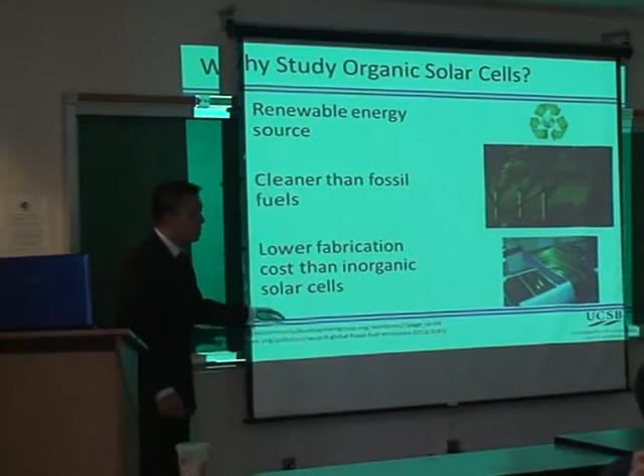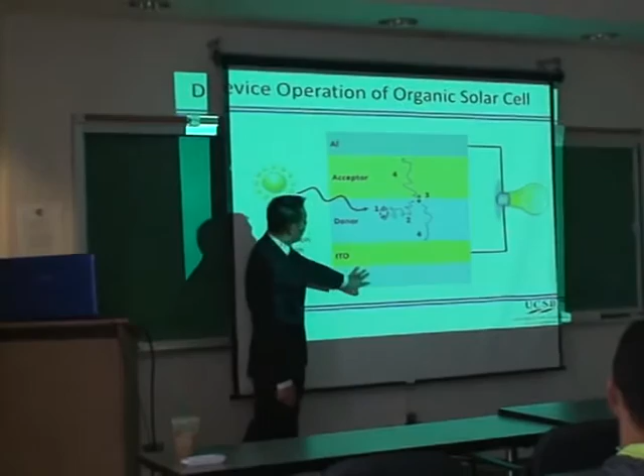The first part of operation is where a photon comes into the material. It could be absorbed by either the acceptor layer or the donor layer. Let's say, for example, it's absorbed by our donor layer. What happens is that when a photon gets absorbed, there's an excitation of an electron to a higher energy level, and what it leaves behind is a hole. These electrons and holes are coulombically bound together, and this is called an exciton. The attraction is so strong that this exciton, this electron and hole, will diffuse together.

That is the second process. Once we form this exciton, it undergoes random walk diffusion, and hopefully it reaches the interface between the acceptor and the donor. When it reaches that interface, the acceptor, often a fullerene, has a strong affinity for electrons and can accept that electron and steal it away. That gives the driving force for charge separation, where we now have the electron in the acceptor phase and the hole in the donor phase. Finally, there's a drift of the electron in the acceptor phase to the cathode, drift of the holes to the anode, and those combine to complete the circuit and give you power. So that's basically the operation of a solar cell.

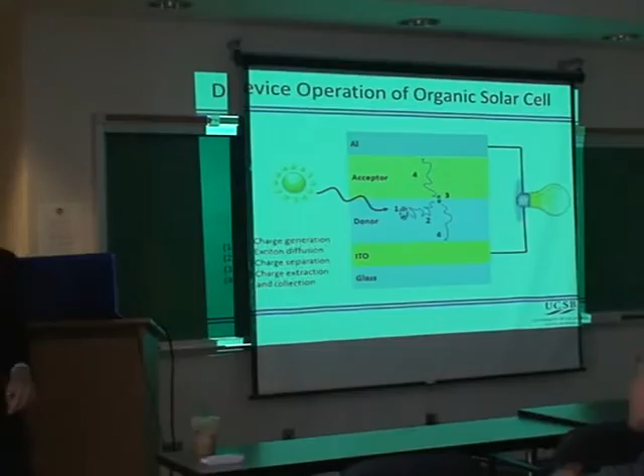And I actually want to show you what one looks like. So this is a funny story — when I teach my classes, I like to talk about my research to the students. One student actually told me that there's a company where you could basically have them mail you a solar cell. So if I find that later, I'll pass it around, but you can actually have them mail you a solar cell.

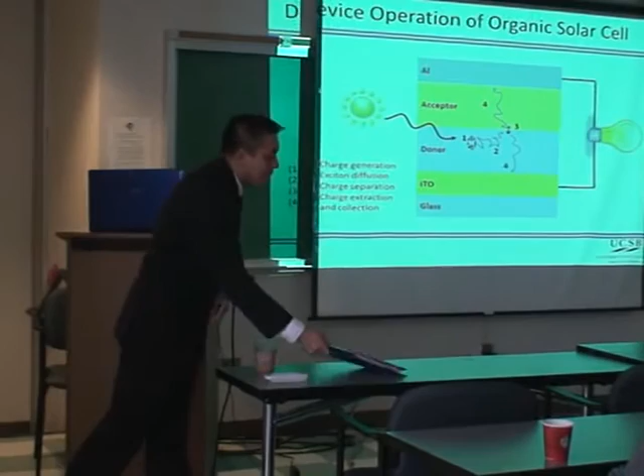And it's actually this really thin flexible solar cell, which you could actually test yourself. It just shows that there are companies making this, and it's actually a reality too. We just gotta work on it a little bit more.

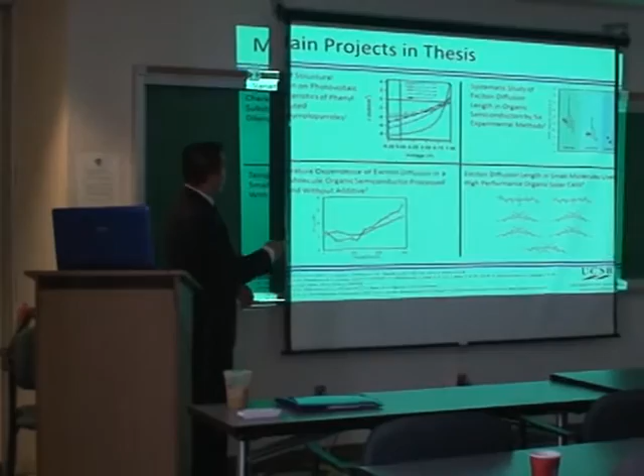So these are basically 4 main projects that I worked on during my PhD. The first project, I had 5 different chemicals, and I studied how slight chemical and incremental modifications affect everything from the packing, the morphology, the absorption, the mobility, and ultimately how that related to device performance in a solar cell. What I then did is I used some of those same molecules for project 2, which was to study how these same chemical modifications impact fundamental properties like exciton diffusion length.

In addition, I wanted to compare different techniques to measure exciton diffusion length, because there are many different techniques, as I will elaborate later. After that project, I wanted to delve deeper into exciton diffusion length, like what is actually the mechanism of exciton diffusion. So in this project, I used temperature studies, and I measured the exciton diffusion length at different temperatures.

In addition, I wanted to look at how processing condition affects the exciton diffusion length. Finally, the last project, I compared a couple different molecules which have previously shown to have high performance in organic solar cells, and I wanted to see what the exciton diffusion length is in these materials, whether they're any different or about the same. Due to limitations on time today, I will only talk about the second and the third project.

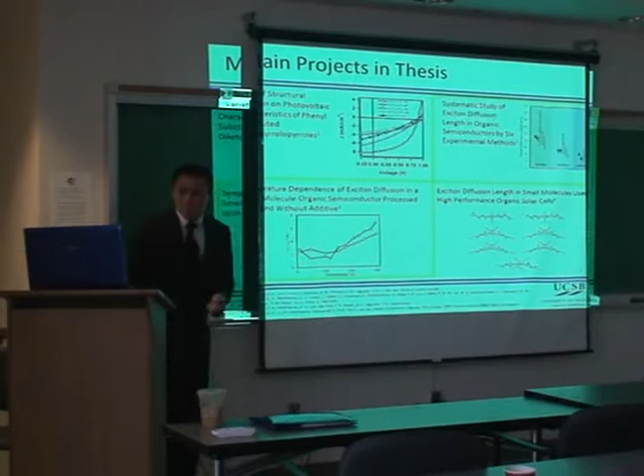Project 1: systematic study of exciton diffusion length in organic semiconductors by 6 experimental methods.

So again, I want to say that I'm focusing on the step where we have just exciton diffusing, and we want to basically increase that length. You can imagine that when light is being shined on this film, excitons are being generated everywhere. But if the exciton is generated down here, it has not too much probability of reaching this interface if the diffusion length is very short. So our goal is to actually increase the length that this exciton can travel.

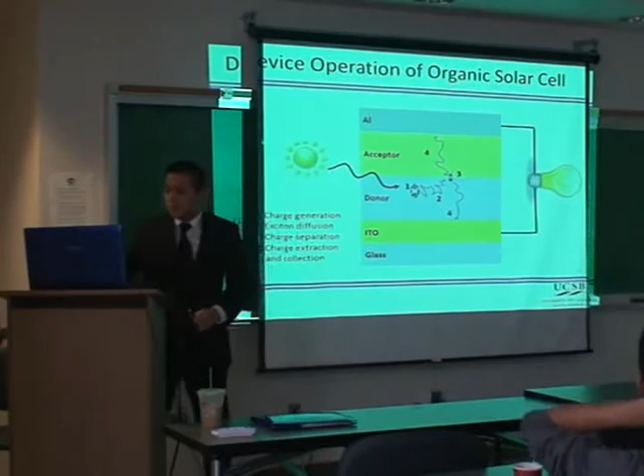So in summary, what we want to do is find the relationship between chemical structure and exciton diffusion length. If we can find this relationship, we can hopefully know what chemical modifications will lead to a larger exciton diffusion length.

Of course, we can study this with literature, because there have been a lot of publications of exciton diffusion lengths in different materials, but there are challenges, because if you have 2 different publications with 2 different compounds, let's say we want to compare the exciton diffusion lengths of these 2 compounds, one was 5, one was 10. Well, this is sometimes challenging because these chemical structures could be very different from each other. They could differ by a number of chemical modifications, so it's hard to tell how one chemical modification impacts the exciton diffusion length.

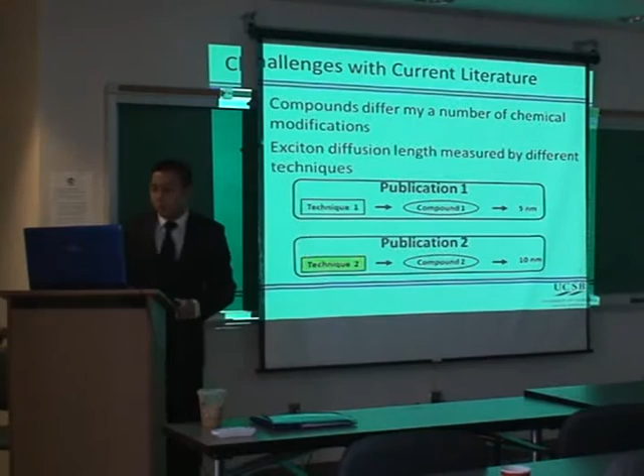In addition, it's further complicated because there are so many techniques to measure exciton diffusion length that there's a very good chance different studies use a different technique, which makes it even harder to compare the 2 molecules to one another. So those are the 2 difficulties of using current literature to study exciton diffusion length.

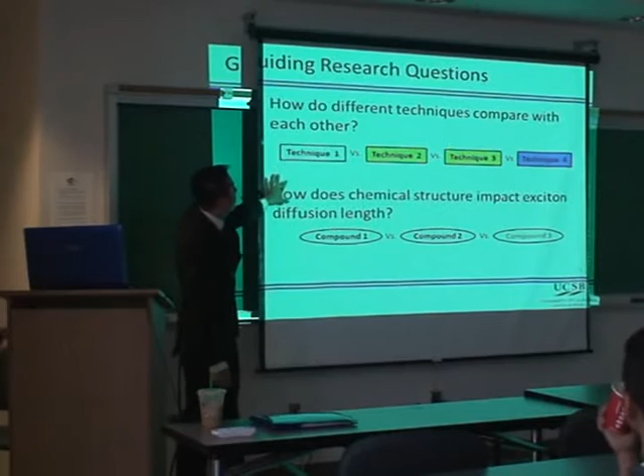With that gap in literature, I developed a couple of guiding questions for my research. The first was, how do different techniques compare with each other? I want to compare the fabrication, the measurement, and the analysis. In addition, at the same time, I want to compare how chemical structure impacts exciton diffusion length for 3 compounds which are very similar, differing only by slight chemical modifications.

So with that, I developed a project proposal: to compare 6 different techniques to measure exciton diffusion length in a class of diketopyrrolopyrrole small molecules. The first choice was what material I would use, so I chose these 3 small molecules because they have very slight but interesting chemical modifications.

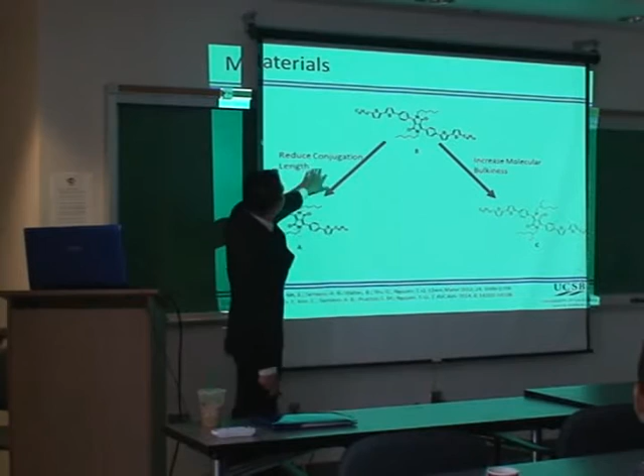For example, when you go from B to A, the conjugation is reduced. What I mean by that is that the number of thiophenes on the backbone is reduced. This one has 2 thiophenes, but molecule A only has 1 thiophene, so we reduce the conjugation length.

And that affects a lot of things actually, because I previously studied these materials in terms of performance and morphology, and I found that as you decrease the conjugation length, you not only affect optical properties, but you definitely affect the morphological properties, like it becomes more crystalline.

In addition, I also studied how increase in molecular bulkiness affects the packing. So the difference between structure B and C is that we've converted the linear alkyl chains to a branched ethylhexyl group. This makes the molecule bulkier and prevents it from packing in film, therefore this film is actually often amorphous - it is kind of randomly packed in a film.

So then I did some literature search to see what are some techniques to measure exciton diffusion length. There are actually a lot. These are 6 I chose to analyze, though there are a few more out there.

When I first saw this, it was kind of daunting. Each technique had a very unique fabrication, measurement, and analysis, and I had no background in this. In addition, no one in my group had previously really studied exciton diffusion length. There was one person who briefly tried it out, Brett Walker, but not thoroughly. So it was very challenging for me to approach this, but nevertheless I moved forward step by step, and through trial and error I worked through it.

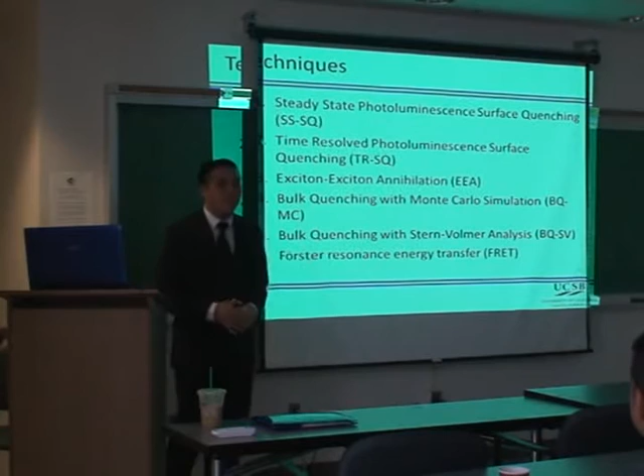What I wanted to present today is 2 techniques on how to measure exciton diffusion length. I'll tell you about the first technique, and also the 4th one, called bulk quenching. The first technique is called steady state photoluminescence with surface quenching, or SSSQ.

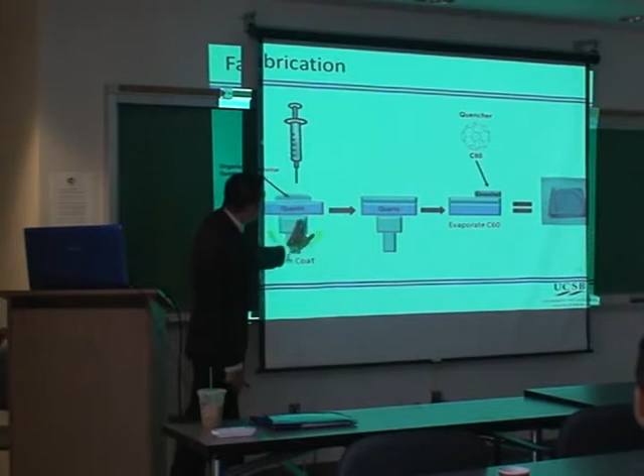The first step is fabrication. What we first want to do is make a layer of our film. We dissolve our organic material in an organic solvent and deposit it with a syringe on a substrate. We then put it on a motor that spins at a specific rate, and that rate determines the thickness. In addition, this thickness is determined by the concentration of the solution we start off with.

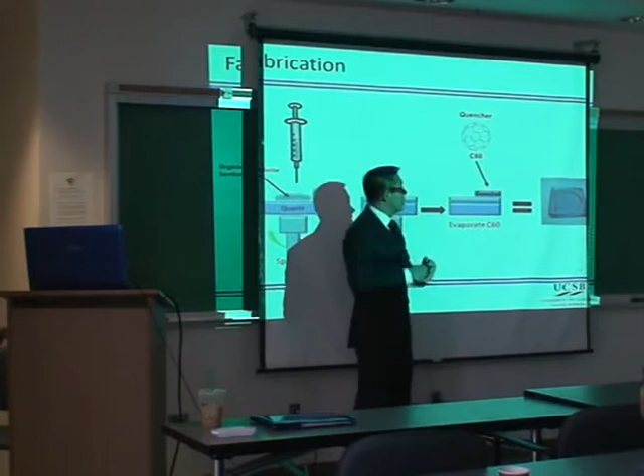We then have a very consistent organic layer on our substrate, and what we want to do next is add a quencher. The quencher we use is C60, which as I mentioned earlier accepts electrons. We cover half the film and evaporate the C60 on our substrate, so half the substrate has the quencher and half doesn't. This reduces the amount of material we need and makes the study more consistent, since we can compare the same thickness on both sides with and without the quencher.

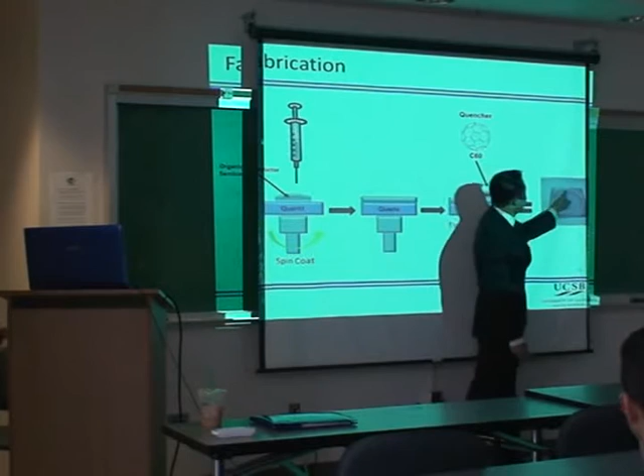The final form of these films looks basically like 2 pieces of glass glued together with epoxy. This is really important because a lot of these organic films are very sensitive to oxygen. If you excite them with light and expose them to oxygen, it's very likely they're going to photodegrade, which might change the chemical structure and reduce the lifetime of these materials.

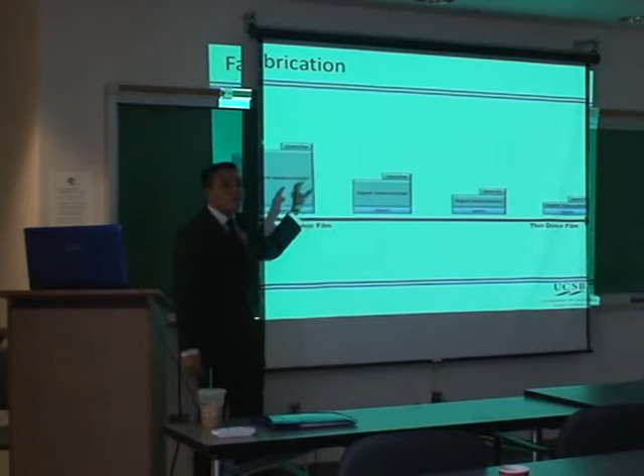What we then do is change the concentration of the solution, and by doing that we're able to produce different thicknesses of the organic layer. So you can see we have thick films, and then the film thickness decreases.

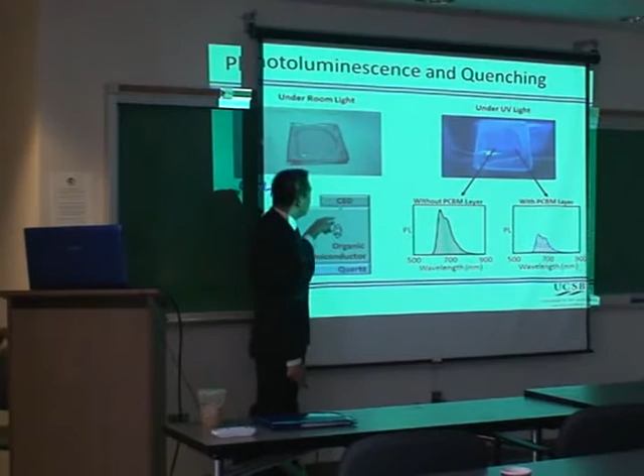When excitons are generated near this C60 layer, there's a good possibility they will reach this quenching interface and be quenched, and therefore they would not be able to relax. One of the processes excitons can do when they relax down to the ground state is emit light. Excitons quenched at the C60 have no possibility of emitting any light, so the amount of light emitted by the right side will be less compared to the left side, and we can actually see that in the spectrum.

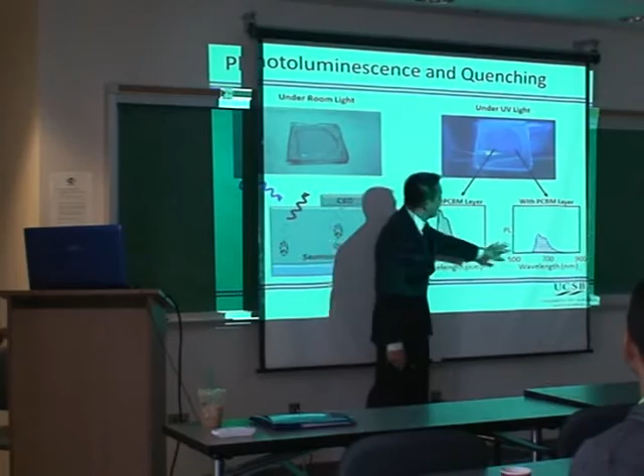When the exciton relaxes back down, it emits a couple of different wavelengths based on the energy levels in the material, with most emitting around 700 nanometers. If you compare the 2 sides, the area underneath the curve is different, meaning there's less total photoluminescence from the right side compared to the left side, because the right side is being quenched at the C60.

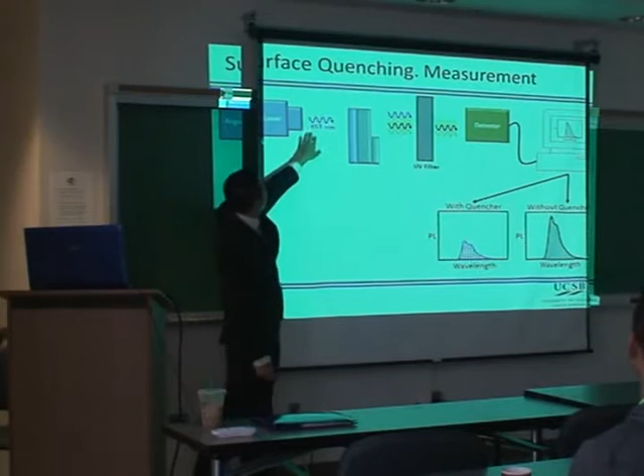So now going on to the measurement. What we do is use an argon laser with a wavelength of 457, pretty close to UV light, and we excite one of the sides. Let's say we excite the side without the quencher first, and we output a number of different wavelengths.

What we then might do is also add a filter, because this UV light is actually quite strong. Some of it won't even be absorbed by this film and will just pass right through. We don't want that to go all the way to the detector, because the detector is very expensive and very sensitive, so we don't want it to ruin our detector. So we filter out the UV, and we only record the fluorescence that comes from this film alone.

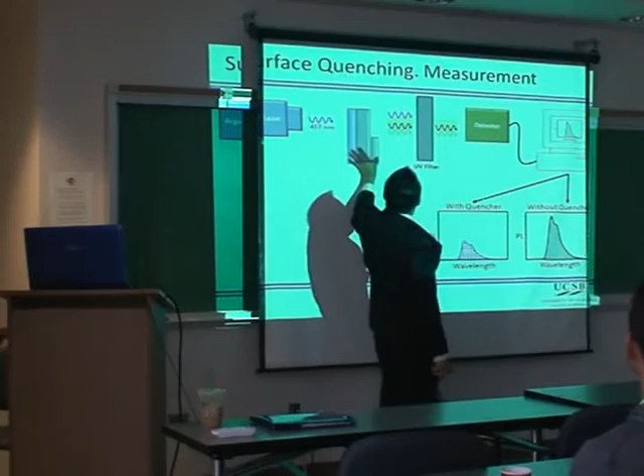Then, as I mentioned earlier, we get the spectrum, which you have here. And if you measure the other locations where there's a quencher, you would get a spectrum where you have a little bit less due to quenching.

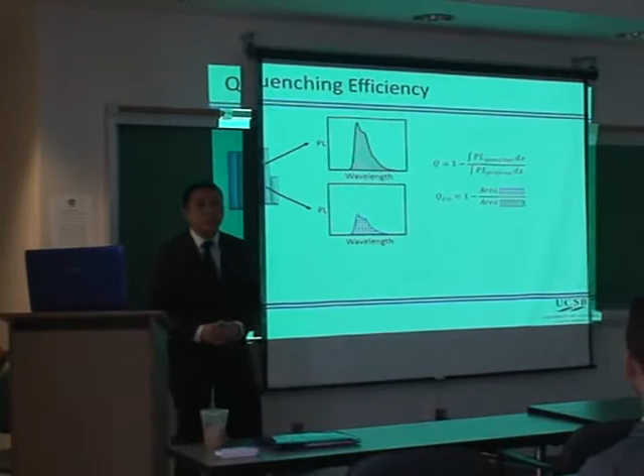So now the next question is, what can we do with this data? Well, one thing you can do is calculate the quenching efficiency. As I mentioned, you have these two different locations, and you could use this formula to calculate the quenching efficiency. Basically this is the integral of the PL with the quencher over the integral of the PL with the pristine. A simple way to think about that is it's basically the area of the film with the quencher over the area without the quencher.

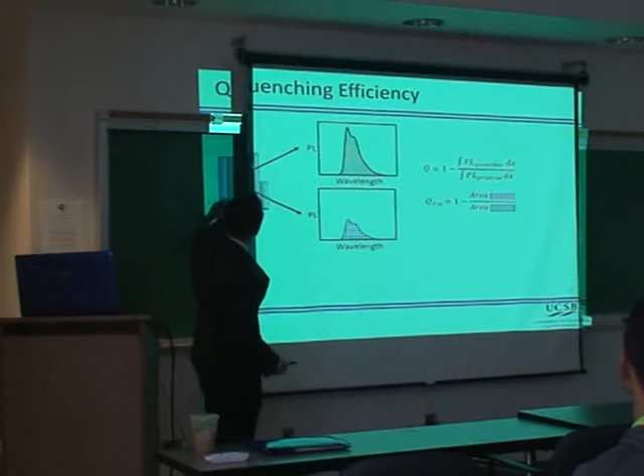So let's say, for example, you had a material with a very long exciton diffusion length. In this case, all the excitons generated on the side with the quencher will be quenched, and your photoluminescence from here will be very diminished, because none of them are emitting, they'll all be quenched. In this case, this whole thing would approach 0, and our quenching efficiency would approach 1. So higher exciton diffusion length, higher quenching efficiency. That's how the two are connected.

So now the question is, how do we connect this measurement with a model to determine what the exciton diffusion length is? What we first have to do is figure out what the exciton density profile is in this film. Actually, it's not homogeneous. You would think that when you shine this film, excitons are generated equally throughout, but in fact they're not. The reason is because as light enters this film, it actually gets reflected at each interface, since there's a difference in index of refraction between each of these materials.

It actually reflects off itself, so it can constructively and destructively interfere with itself, creating these patterns. Further, that optical field could be absorbed by the organic material, decreasing the field. And then finally, with that absorption, you create this absorption profile, or exciton density, here. This is kind of like the initial condition, the initial population of excitons.

What we want to do is see what's going to happen now. You have this initial population — what happens? Well, how excitons move is through diffusion. An example of diffusion is when you add a dye into water: the dye starts off very concentrated and it diffuses out.

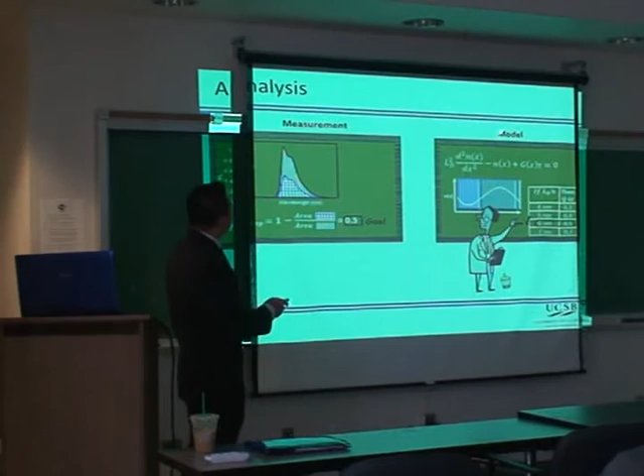So how I like to think about it is that there's this little guy in the computer, and he's kind of comparing a model with the measurement. Let's say, for example, that we did the measurement and calculated quenching efficiency, and we got a number of 0.5. So that is our goal.

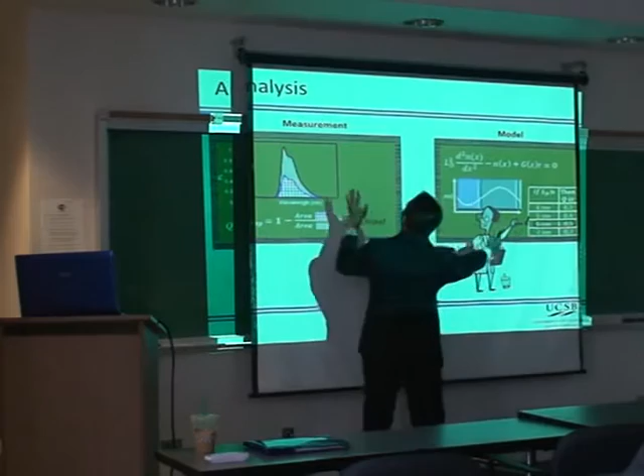So now the guy in the model wants to say, okay, if you have these different exciton diffusion lengths, these are the different quenching efficiencies you would have. And he matches the quenching efficiency with the exciton diffusion length. That is basically how they merge the model with the measurement, and you obtain the exciton diffusion length with this technique.

So finally, the verdict on this technique. The fabrication requires many films, 10 to 20. I actually reduced the number of films because I evaporated only on half with C60, so I was able to cut it by half. But really, you have to probe a lot of different thicknesses, from 10 nanometers up to above 50 nanometers. So that requires a lot of material, a lot of time.

In addition, it's actually very difficult to find an efficient and robust quencher. Before using C60, I tried a lot of other materials because I wanted an interface that was firm, strong, and efficiently quenching. But a lot of materials like TiO2 and polymer acceptors just didn't work as well as C60. So finally, I settled upon C60.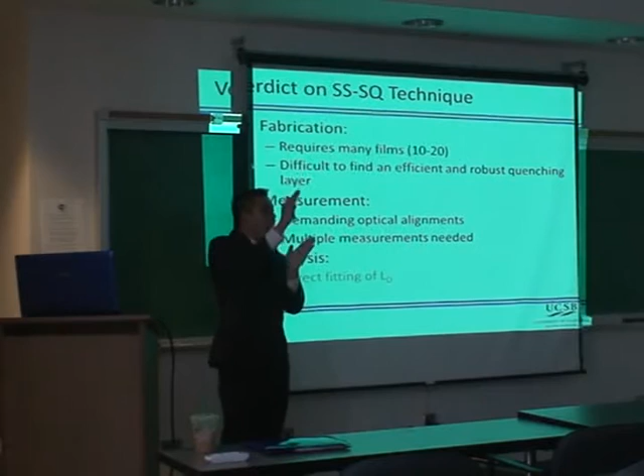In terms of measurement, it's actually quite demanding too. When we measure these films, we have to hit them very normally. If we were to hit them at an angle, some of the light will get reflected, and that would appear as quenching. So it's very important that we hit all these films very normally, and that requires very accurate optical alignments.

In addition, there's also a lot of other measurements you have to do. You have to make sure you know the exact thicknesses of these films, and you have to know the optical constants—the index of refraction and the extinction coefficient—which requires additional modeling with spectroscopic ellipsometry. Finally, the one good thing is that it does fit for the exciton diffusion length directly. You are fitting to that number directly, so you're measuring that. Other techniques, which I'll discuss after, actually figure out a different value and then calculate the exciton diffusion length.

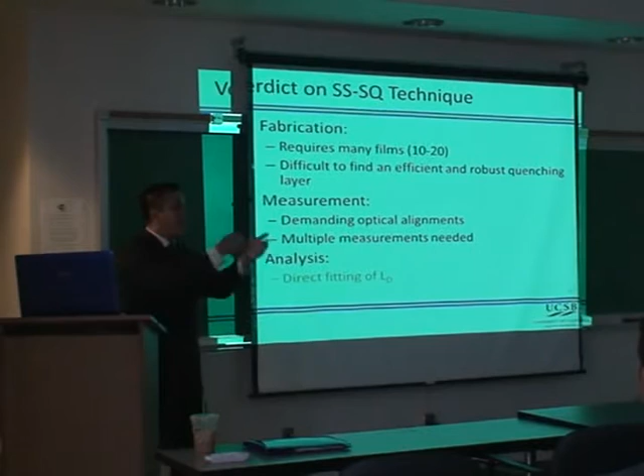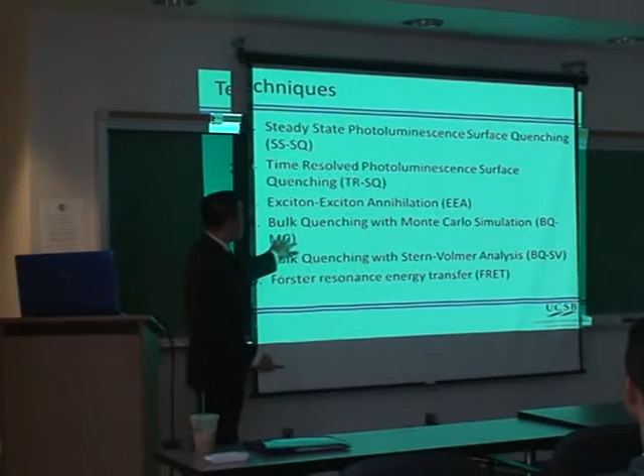So with that, I struggled through these two and finished them, and I wanted to find another technique that was more robust, easier to do for a bigger study, because I didn't want to just keep comparing techniques. Luckily, I was able to collaborate with Olex and travel to the Netherlands, and he had another technique that was really nice, where you could measure the exciton diffusion length with a Monte Carlo simulation and measure it in bulk. I will describe that technique.

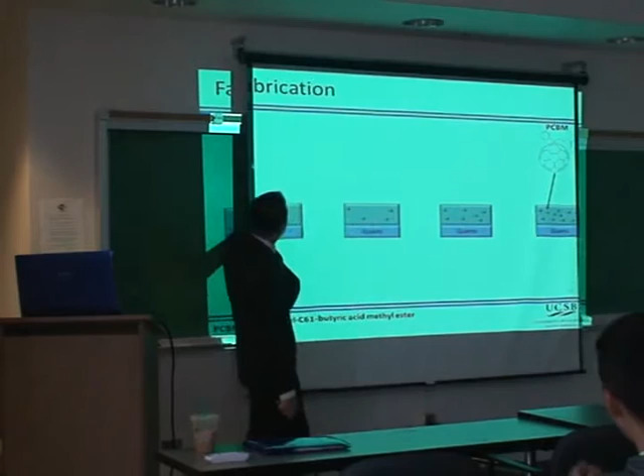So, bulk quenching with Monte Carlo simulation. The preparation is similar—we just use spin coating, but now we add an extra material. These balls are PCBM. It's very similar to C60, but we've added some additional groups that make it soluble in organic solvent. So we mix different concentrations of our organic semiconductor with the PCBM, and we're able to produce different films with different concentrations of PCBM.

The next thing we do is our measurement. This time we have a different type of laser—a titanium sapphire laser that emits at 400 nanometers. The main difference from the other lasers is that this one emits a very short pulse. It kind of pulses the film. So at time 0, you have this population of excitons, and then they'll gradually decay.

As I mentioned earlier, when you have excited excitons, they can emit at different frequencies. But what we want to do is just record one wavelength. So we'll use a monochromator to select one of these wavelengths, and we'll turn on the detector. This detector, instead of recording at different wavelengths, will actually record as a function of time. It will just sit there and wait as these excitons arrive.

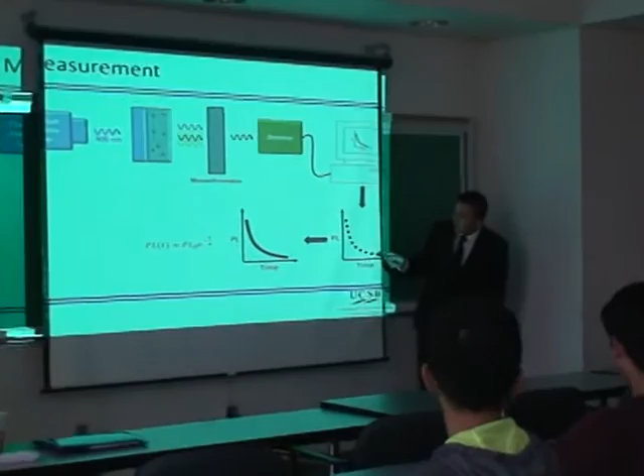What will happen is that we get these points appearing on a graph, showing excitons arriving in the detector at different times. If you were to connect all these points together, it would form a curve here, which is basically an exponential decay. And that can be fitted by a simple decay formula.

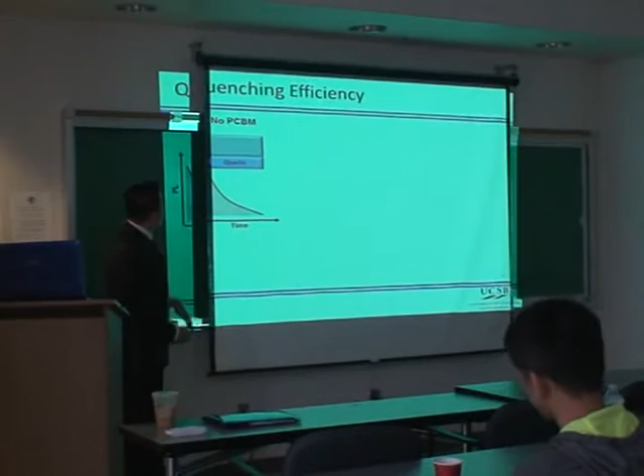So now the question is, how do we calculate the quenching efficiency of this curve? Well, let's first look at the plot for a film without any PCBM.

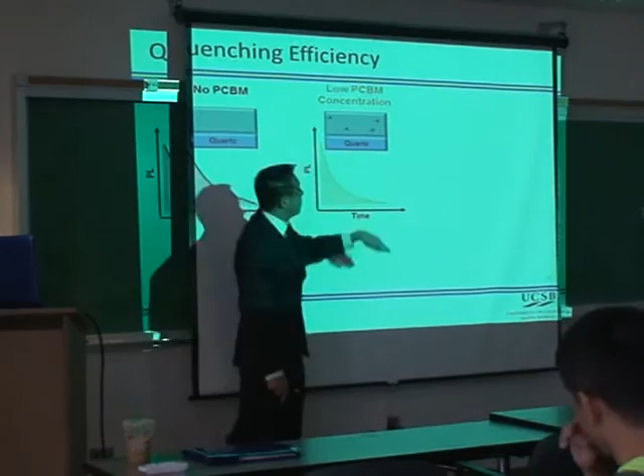Like I mentioned earlier, we'll have this exponential decay curve, and we'll have an area underneath. But if we add some PCBM, there's a more rapid decay of the excitons, because there's a less likelihood of longer-lived excitons, since they're more likely now to reach a quencher. So therefore, we cut down the exciton lifetime. And to exaggerate that further, if we increase the PCBM concentration, the lifetime decreases further.

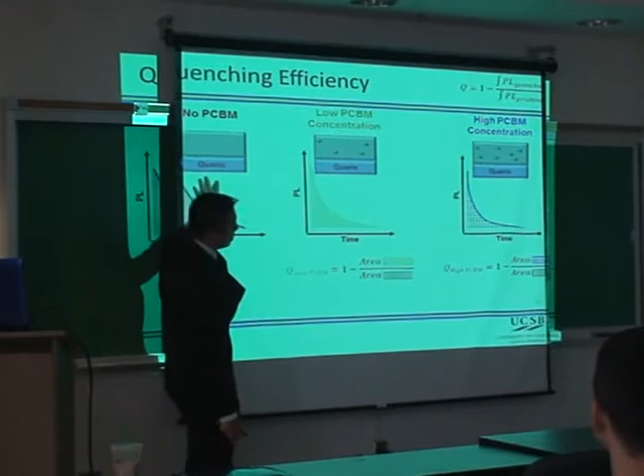So again, using the similar formula as last time, where you have the integrals with the quencher over without quencher, we could calculate the quenching efficiency of each of these films. It's just basically the area with the quencher over the area without. This is the film without any quencher, the control you can think of. And what you see is that when you have more quencher, you have a higher quenching efficiency compared to when you don't have as much of a quencher.

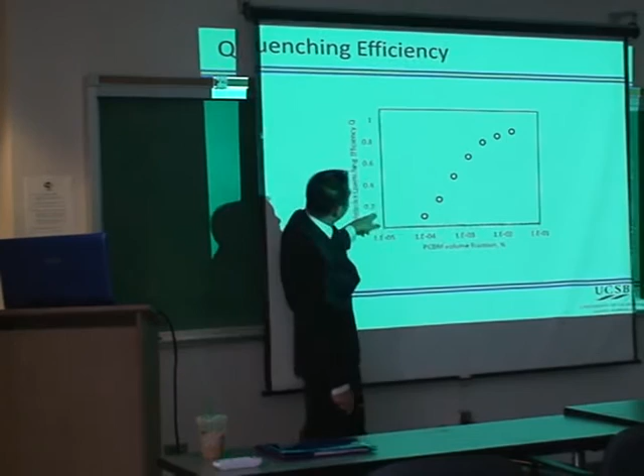So we could do this for a number of different films. We could prepare films with different concentrations of PCBM, and for each of those we could calculate a quenching efficiency. And this is the kind of plot that you would get by doing that.

So the next question is, how do we connect this measurement with a model to determine the exciton diffusion length? This kind of symbolizes the Monte Carlo simulation. A Monte Carlo simulation is basically a program that runs multiple trials. It's kind of a random process, and that's how it determines and fits for the exciton diffusion length.

To give an example, it could run a simulation of exciton diffusion for a couple of different situations. Let's say for low diffusion, medium diffusion, and high diffusion. For low diffusion, not many excitons will be quenched, so you should have this pretty broad curve. But when you have a very high diffusion coefficient, these excitons are more likely to be quenched by a PCBM, therefore the lifetime will be cut down, and you would have this trend where you go from low quench efficiency to high.

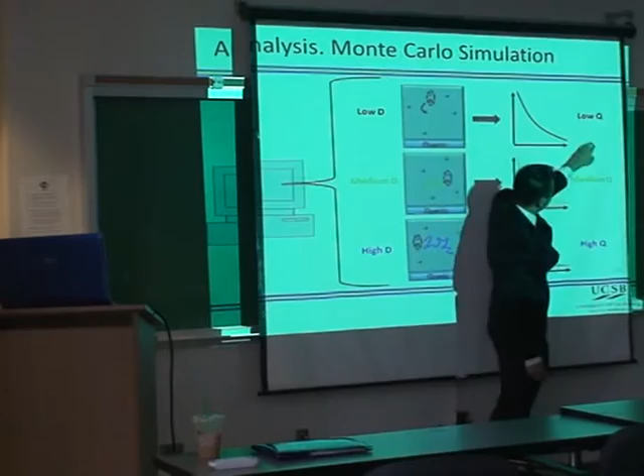So finally, we come back to the little guy in the computer, and what he wants to do is compare the measurement with the Monte Carlo method. Let's say, just for example, that you do the measurement and you get a quenching efficiency of 0.5. So that is the goal to look for.

What you then do with the Monte Carlo is simulate for different diffusion coefficients what the quench efficiency would be, and then match the two. So you see that 0.5 matches 0.5 here, which corresponds to a diffusion coefficient of 10 to the negative 4.

You can then plug this into the simple equation for an exciton diffusion length, here D, and tau is the lifetime, which can just be measured from the pristine film. Finally, you can arrive at an exciton diffusion length. And this is what I meant earlier, that we're not directly measuring the exciton diffusion length, we're actually determining D, and then figuring out what LD is after that. So that's the difference compared to the other technique earlier.

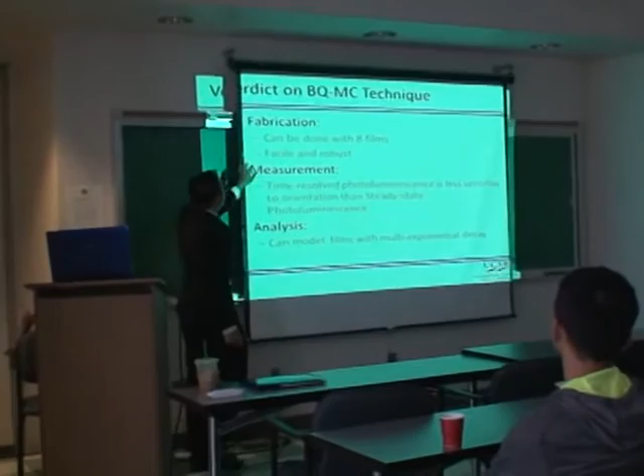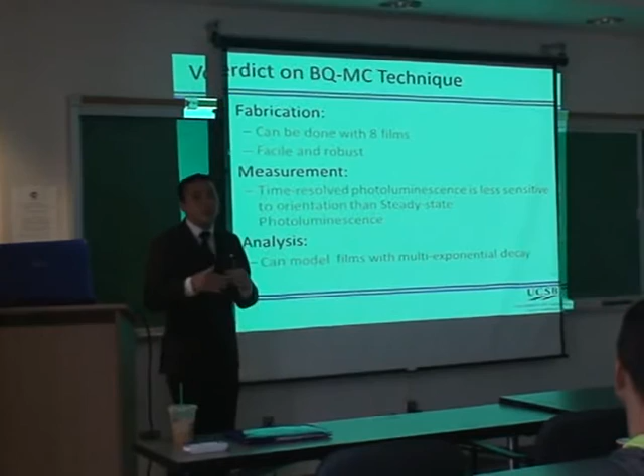So finally, the verdict on this bulk quenching method. The fabrication is pretty nice because it could actually be done with as little as 8 films. And the method is very robust. Spin coating a blend film is a lot easier than preparing these bilayer films. It requires less material, fewer procedures, fewer steps.

In addition, the measurement uses time-resolved spectroscopy. As I mentioned earlier, with steady state, it's extremely sensitive to orientation of the film. But time-resolved is a little less sensitive, so it makes the measurement a bit more accurate for our exciton diffusion length.

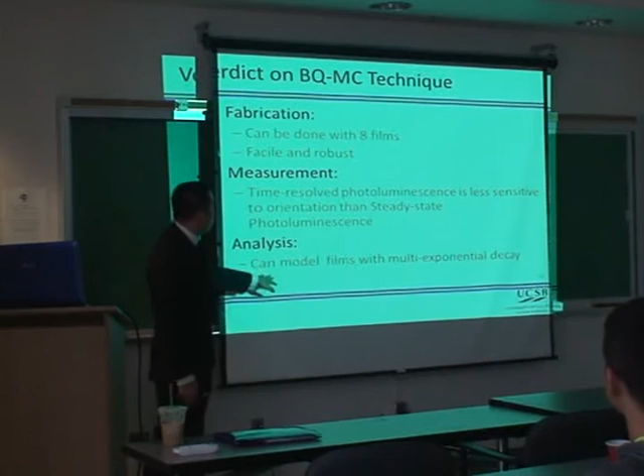And then finally, the analysis. It's also nice because this model can actually measure multi-exponential decays. There are some methods that only work with single exponential decays.

So I discussed technique 1 and 4, and I don't have time to discuss other techniques, but rest assured that I did go through these. I actually collaborated with a lot of groups, like one in Ireland, and we went through all 3 materials with all different techniques, comparing the fabrication, measurement, and analysis. It's a very comprehensive work.

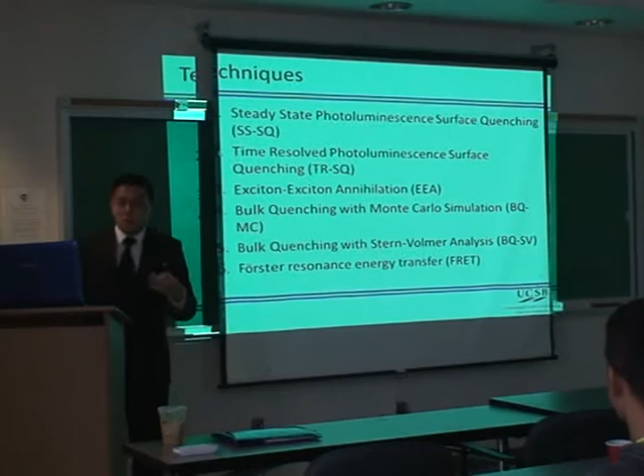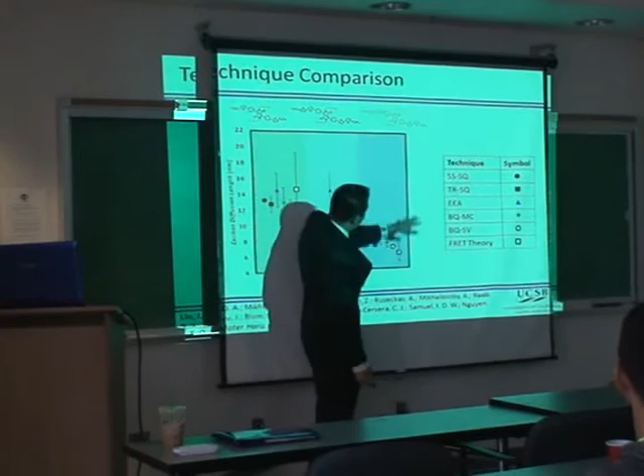So one thing we can do first is compare techniques, and one way we can do that is just look at one material with different techniques. Let's start with this material here, the bulky group. We can see that they actually lie all pretty close together, within the error of their values. So this would seem to indicate that the techniques are very similar. No matter what you get, you'll get the same result.

But if you look at this material here, the smaller one, now we get this larger distribution of exciton diffusion length. This was very confusing — same material, but different exciton diffusion lengths and larger error. The reason is that this material is very crystalline relative to this one, which is amorphous. When you have crystalline materials, they're extremely sensitive to how you process them — how long you wait for them to dry, how fast you spin them, the ambient temperature — anything that changes that morphology. And that morphology will change the exciton diffusion length you measure. So the conclusion is that if you're working with crystalline materials, you have to be careful comparing different techniques. It's maybe only good to compare amorphous materials between different techniques.

The next thing we could do is, instead of comparing techniques, compare chemical structure across these three materials. What we see is there's actually a trend downwards. One thing we found is that this correlates pretty well with the crystallinity. We did X-ray diffraction measurements and measured the order in the film, and we see that this trend correlates with the order in the film.

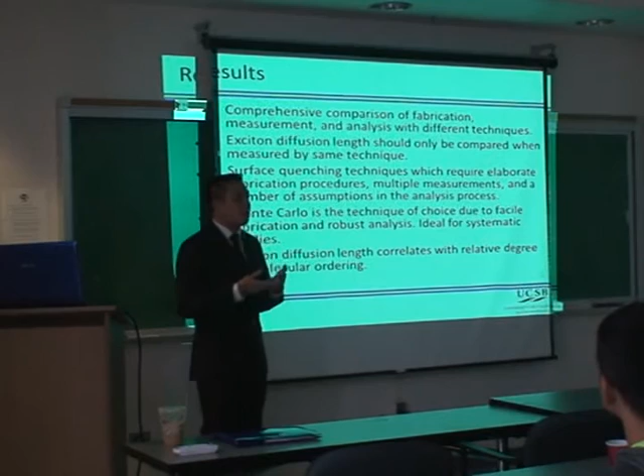So to summarize, the main contribution of this work was that it provided the research community with a comprehensive comparison of the fabrication, measurement, and analysis of different techniques. What that enables is that a new researcher could come in and say, okay, this is what I need in terms of instrumentation, and this is the type of material properties I might want to consider if I want to do this process.

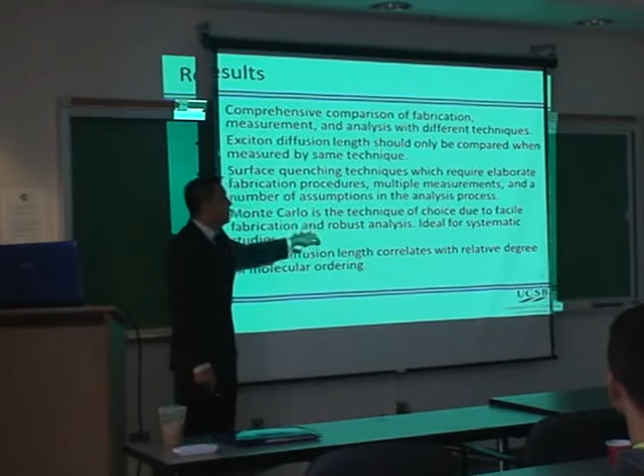In addition, my work showed that exciton diffusion length should only be compared between the same technique, just to be safe. I also found, from experience, that surface quenching techniques are quite demanding — they have elaborate fabrication, multiple measurements, and a number of assumptions in the process. However, bulk quenching with Monte Carlo simulation is actually a really good technique because it can be done very quickly, and you can do a lot of different systematic studies. Finally, we find that the exciton diffusion length correlates with the degree of molecular ordering.

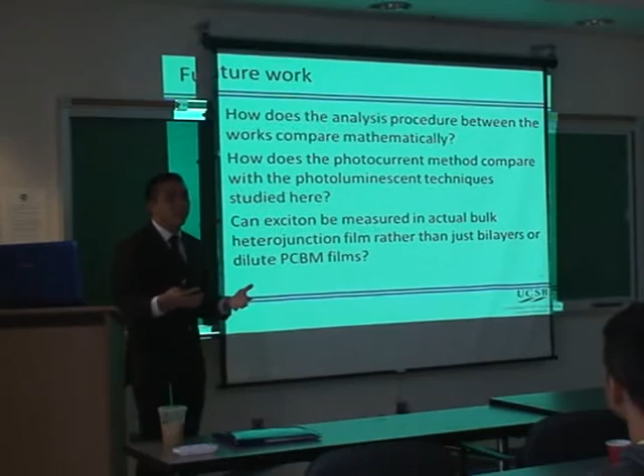So if I had more time for this project, some future work questions I might ask include: how does the analysis procedure differ between the works compared mathematically? How does the actual math calculating the exciton diffusion rate compare? Actually, this is being done by one of our collaborators, because for two of the projects I worked on, I didn't have the expertise to do the analytical modeling, so I collaborated with Professor Carlos García-Cervera, and they are now working on the mathematical model.

Some of the preliminary results actually show that some techniques overestimate the diffusion coefficient compared to others, just based on mathematical calculations. Another question I might ask is how does the photocurrent method compare with the photoluminescence techniques?

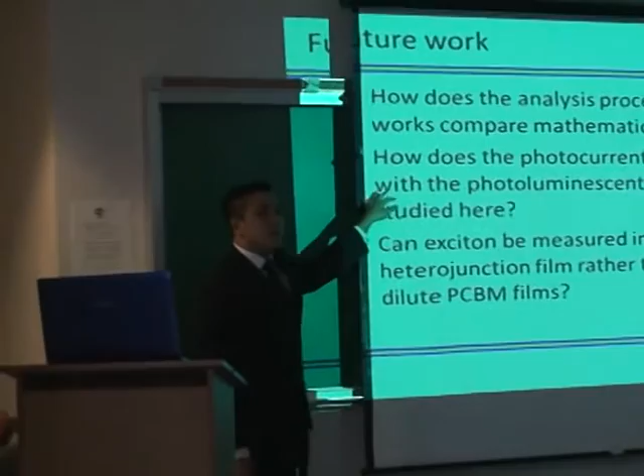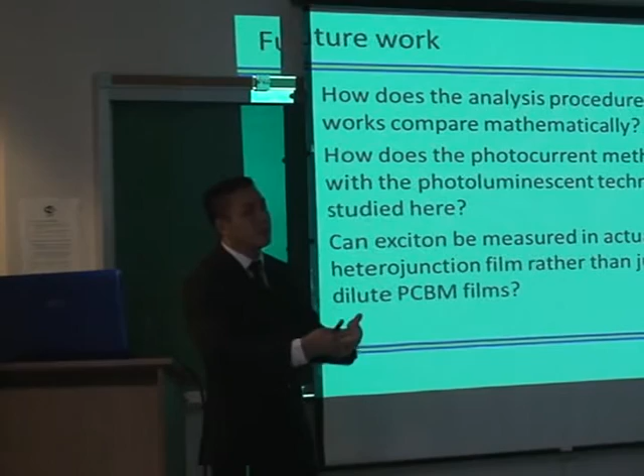All the techniques I studied in this specific work were for materials which are able to emit light. But there are actually a lot of materials that aren't able to emit light, and for those materials, the way to still calculate the exciton diffusion length is to measure the current, because the more excitons that reach that interface, the more current you would generate. So you can calculate it that way too.

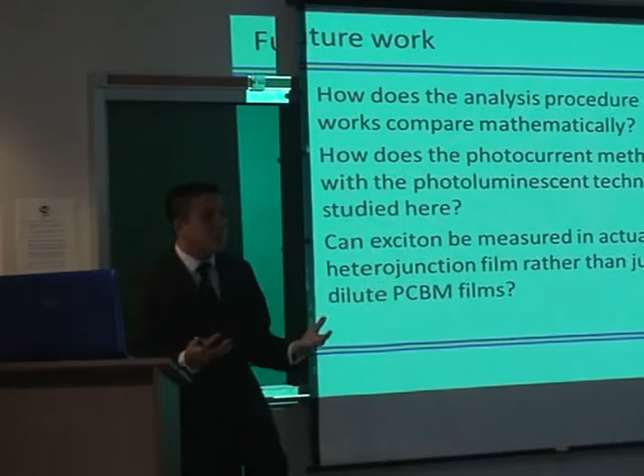And then finally, another question that might be interesting to probe is: can exciton diffusion length actually be measured in a bulk heterojunction film rather than just a bilayer or dilute PCBM film? That's usually the conditions that we probe, but most solar cells are actually a bulk heterojunction, which means that the two materials are intimately mixed together.

So now that I finished that project, I knew a good technique to use is Monte Carlo, so I could use that technique to do another study. One thing I wanted to probe was the temperature dependence of exciton diffusion length in a small molecule semiconductor, with or without additive. I wanted to give some background for that motivation.

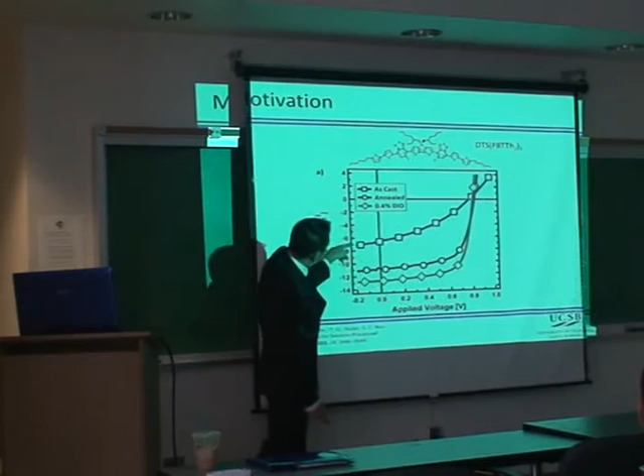In the field of organic semiconductors, there are actually a lot of studies that have shown that when you process a film with a high boiling point solvent, such as diiodooctane, there's an increase in the current generated. For example, this blue going to this yellowish goes from 7 to 13. Most of the studies actually study how that affects charge transport and charge generation, but there are no studies about how that affects the exciton diffusion rate. So that was one of the questions I wanted to answer - how does that affect that part?

Another motivation for this study was that another publication by a colleague showed that when you compare the exciton diffusion rate for different materials and a calculated trap density, you find this trend where when you have a larger concentration of traps, you have a shorter exciton diffusion rate. So what I wanted to see is does processing affect the number of traps, and how does it connect with the exciton diffusion rate? So big picture wise, I want to find out the relationship between processing, exciton diffusion rate, and also trap density with the exciton diffusion rate.

From this, I developed three guiding questions. One was, how does the mechanism of exciton diffusion rate in small molecules compare to polymers? Another question was, how does the processing conditions impact exciton diffusion rate? And finally, what is the relationship between exciton diffusion rate and the exciton trap density?

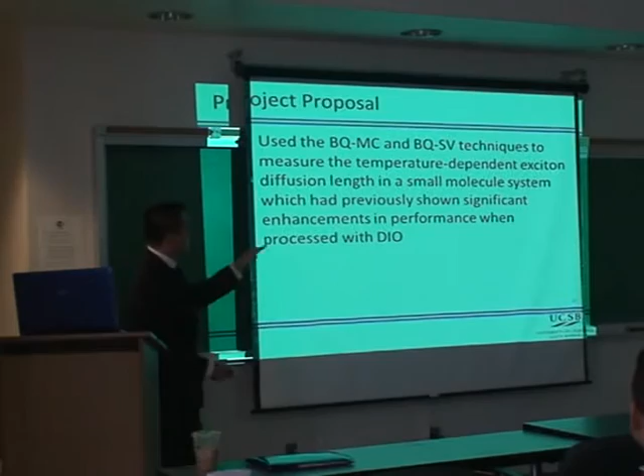The project proposal was basically to use the bulk quenching method plus this bulk quenching Stern-Volmer method. I didn't discuss this technique, but what's nice about this one is that you can actually calculate the exciton trap density in your film. That's why we wanted to do those two in parallel, and compare these two with temperature dependence - measuring the exciton diffusion rate at different temperatures, and also with different processing conditions, with and without the DIO.

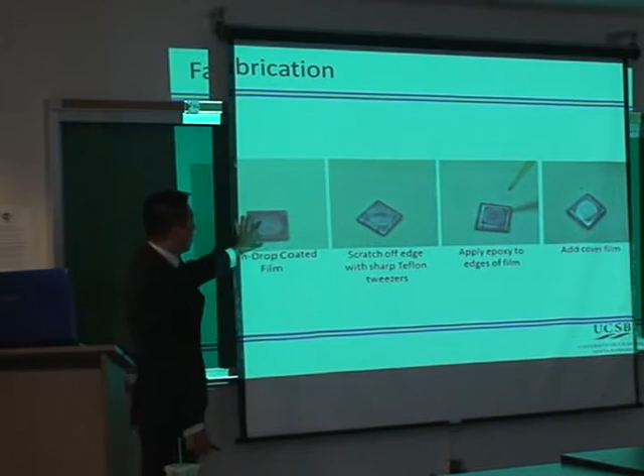So the first step was fabrication. We have our quartz substrates, and we spin coat them. These are actually quite small - smaller than a penny, which made them difficult to work with. The reason why we had to do that is because we didn't have a lot of material, and some of these materials are actually very expensive and require a lot of work to synthesize.

So we spin coat it, and from experience, I learned that you should scratch off the edges - you want to get all the way down to the glass. The reason is because the next step is you apply some epoxy around the edges, and you want that epoxy to go all the way down to the glass where it can get hold. If it grabs onto the organic layer, it'll just peel right back off - you want it to get down to the glass.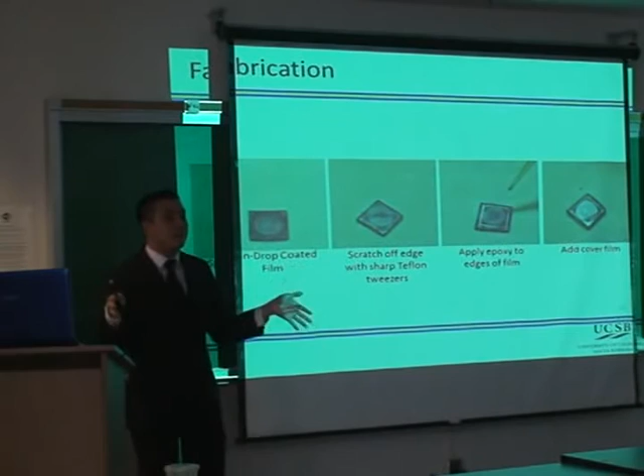And then finally, you put another substrate on top to encapsulate it, and now you're enclosed. This, I have to remind you, is all done in a glove box filled with nitrogen, so there's no oxygen to be in this film upon encapsulation.

So we fabricated a number of films, and then we had this setup where we could measure 3 films at a time. This was, in a way, a little bit inconvenient, because we have to cool down the temperature all the way down to 4 Kelvin. If we only can measure 3 at a time, that requires a lot of back and forth - going back to room temperature, back to cold, back to room - if we want to probe a lot of different conditions.

Just to give you an idea of the setup, we had the laser set up back here, and we had to actually order this helium tank. This is actually quite expensive - it was like about $560 for this tank. The problem with this is that not only is it expensive, but it kind of evaporates, and when you get this, you have to do the experiment right away.

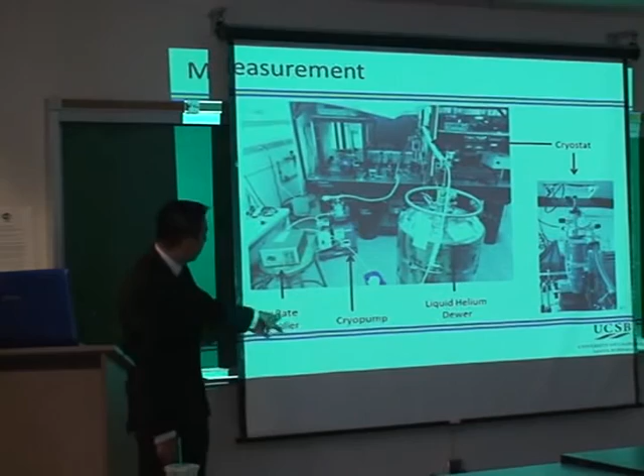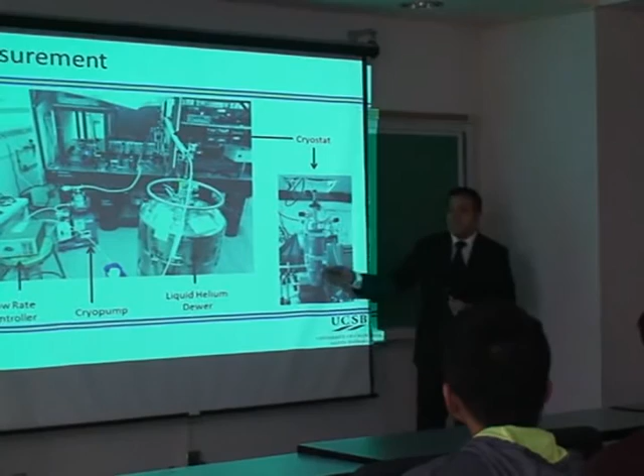What we also had here in our setup is a flow rate controller. This allowed us to manage the rate of flow into our setup so that we can control the temperature - we could either cool it down or heat it up. This was the cryostat, where we put our film in, the 3 that I showed you, and we measured through here. What's also important is that we use a cryo pump to pump down the walls, because we want to create a vacuum around the walls since the inside will be very cold, 4 to 10 Kelvin at one point. What can happen is condensation can build up if you don't have a good insulation layer around this cryostat.

Before that, I wanted to share a funny story. During that process, me and Oleg had to work many hours, at least 15 hours a day. We'd take lunch, come back, do the measurement, and then one Sunday we were doing the measurement and started seeing condensation building up. We realized it was because one of the O-rings had a crack, preventing a good vacuum, so we had all this condensation building up.

So what we did is we drove down to Kmart and picked up a little $10 fan and put it next to it, and for that day at least we were able to drive off the condensation and continue the experiment. I thought that was funny because we have this $560 helium tank and expensive equipment, and we're using this little cheap fan.

But anyways, so now we have this, we finally had all our results. I don't want to go through all the calculations, even though it took a long time, but I just wanted to summarize what our result was.

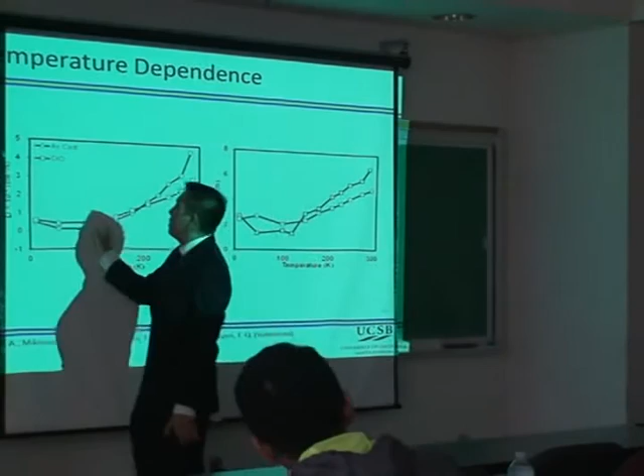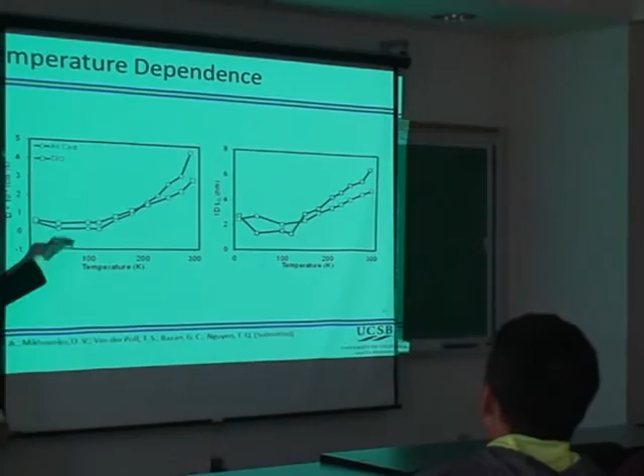So this confirmed that the mechanism is similar to polymers. But one thing we did find that was kind of unique compared to polymers was that the amount of diffusion in this low temperature regime was actually quite low, the polymers were about 3 times higher compared to this small molecule. So that was one interesting difference we found between the two.

In addition, in this study we wanted to compare the trap density. Using this equation, we plug in the diffusion coefficient we measured, the pristine film lifetime, and the lifetime without traps, which we can measure from the solution, and we can then calculate what the trap density is.

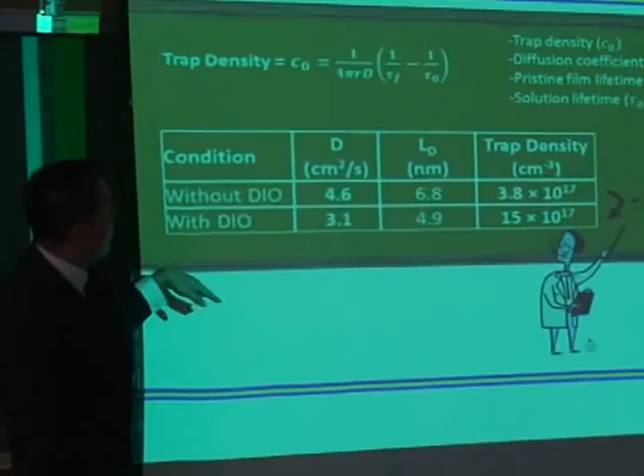What we find interesting is that when we add DIO, we have this decrease in exciton diffusion length from 6.8 to 4.9. This is quite counterintuitive because we knew from previous studies that processing with DIO increased the crystallinity of the molecular ordering, so it kind of contradicted our previous work and a lot of other works.

In addition, what's also very interesting is that we found the trap density increased from 3.8 times 10 to the 17 to 15 times 10 to the 17, which is about a 4 times order of magnitude increase in the trap density. So both of those results were kind of unexpected, but the nice thing is that it raises more questions for future work.

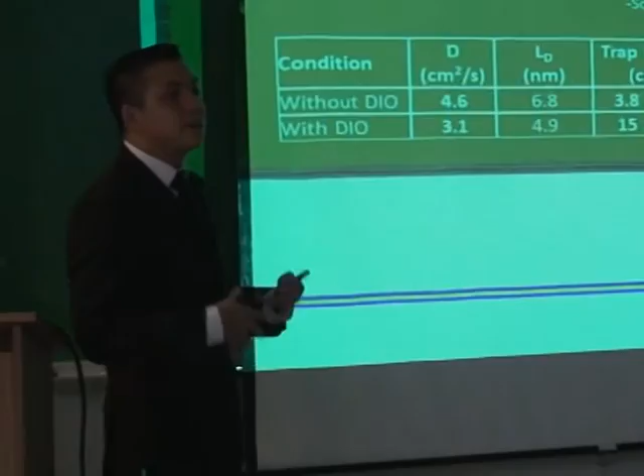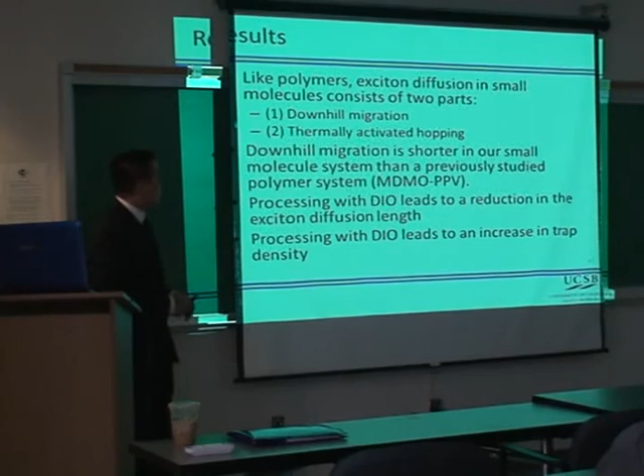So just to quickly summarize: in polymers there are 2 phases of exciton diffusion, the downhill migration and the thermally activated hopping, and that's what we confirmed. We found that downhill migration has a smaller contribution in small molecules compared to a polymer system. We also find that processing with DIO leads to a reduction in exciton diffusion length and an increase in the trap density.

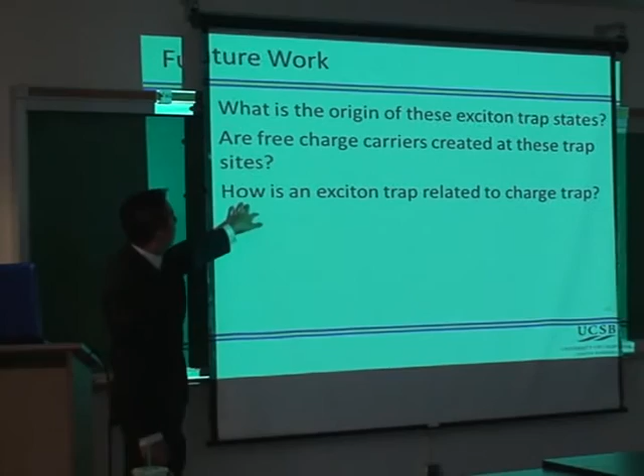If I had more time to continue this work, some interesting questions I might approach would be: what is the origin of these exciton traps? Is it actual molecules in there, or is it grain boundaries being formed? What is quenching these excitons? Another question is, what happens when these excitons reach these trap states? Are free charge pairs generated there? In addition, how is an exciton trap related to a charge trap? There's previous work showing the density of charge traps is almost equivalent to the density of exciton traps. So the question is, are they the same thing, or kind of the same thing? How is that connection actually?

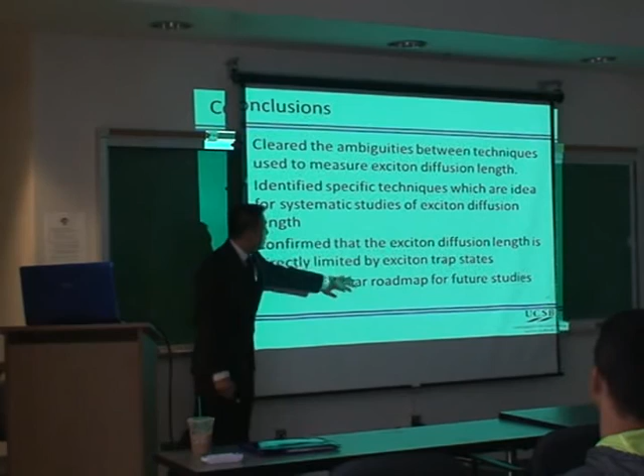So overall conclusions for the dissertation: my work basically cleared up the ambiguities between techniques used, and also identified specific techniques which are useful, such as Monte Carlo for systematic studies of exciton diffusion length. In addition, my work confirmed that exciton diffusion length is directly limited by these trap states. And finally, now we have a clear roadmap and direction for future studies.

There's a lot of people I have to acknowledge through many years here and many collaborations. Thank you very much for supporting me throughout all these years. I know it's been very challenging and the projects have been very frustrating, but thank you for continuing to support me and believing that I could get this project finished and completed.

Jinhua was also like the father of synthesis. And Olex, I owe a lot to him. He really mentored me throughout my last couple of years, telling me how to do research even more systematically, and also giving me good discussions.

Riley Rao was the undergrad that I worked with. He was very bright, we struggled through the bilayer quenching techniques together. Definitely Manani Toy, a former member, was there to support me as a good friend when I first started. And Michelle Guy, who I also collaborated a lot with on a couple of different projects. And there's some new members too, like Wei, a couple of new people that came in.

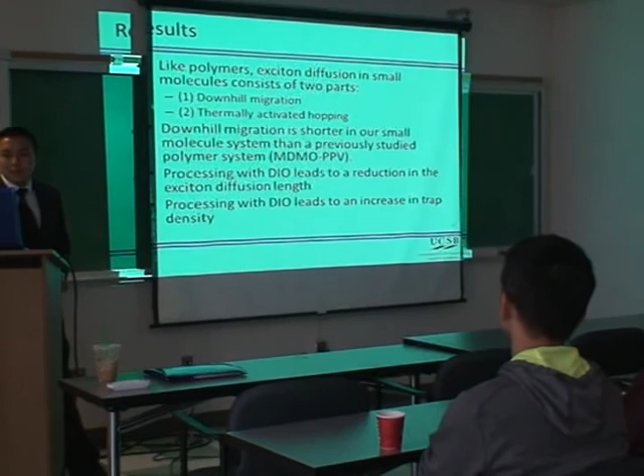Other questions? Alexander asks: if you look at the temperature-dependent data on the exciton diffusion, you see that there is diffusion at low temperatures when the thermal hopping is frozen. Do you think that this is due to Forster energy transfer, because it's dipole-dipole and should be independent of temperature? Can you rephrase that again? Sorry, do you think that diffusion at low temperature can be caused by the Forster energy transfer mechanism?

Yeah, that's definitely a possibility too, and that would be something we would want to tease out, what the actual mechanism of this diffusion at low temperature is. Maybe one way we could approach that is to further modify the processing conditions, because one thing we do want to see is how the density of states is changing in these films as we process them, and we'd have to use other techniques to measure that. I think that would be an interesting question too.